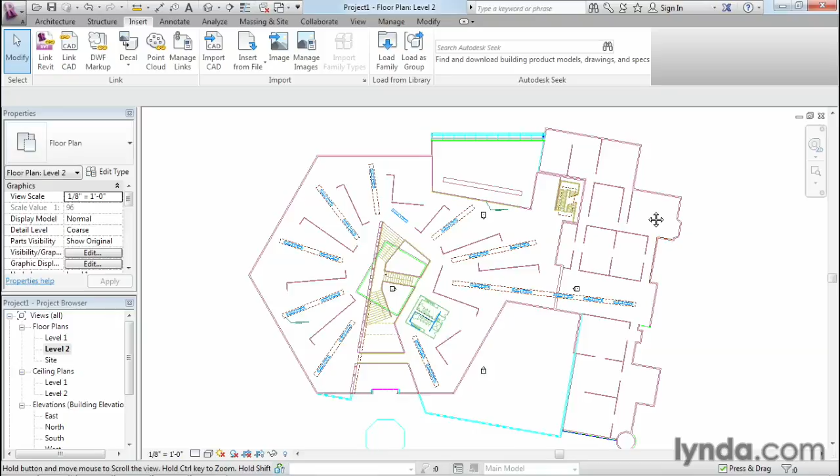So what I'm going to do is just pick some area of the file to work in. I'll pick these galleries over here. This is a museum gallery that we're looking at. I'm going to go to the Architecture tab, click on my Wall tool, and I want to just choose the basic settings. Let's do a 5-inch wall, leave the height unconnected for now, and use a center location line.

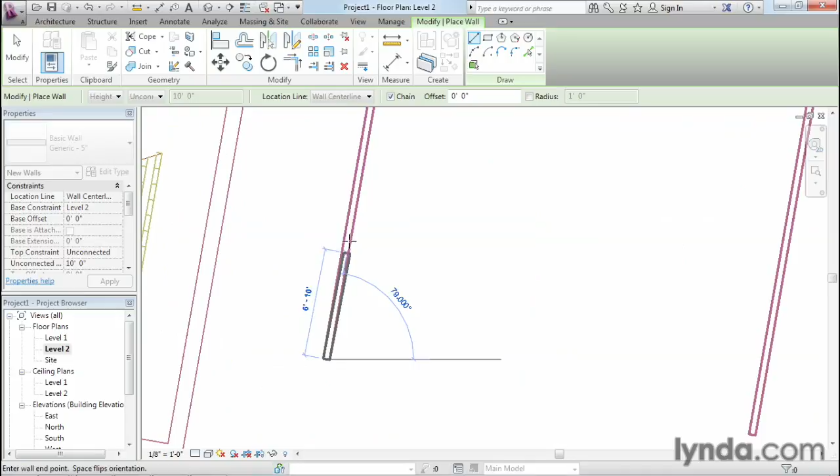Now, the reason I'm going to do that is Revit does this kind of ingenious thing where it sees the two parallel lines in the CAD file. If you zoom in, you can kind of tell that it's finding that center line and allowing me to draw this wall directly down the center of these existing parallel CAD lines.

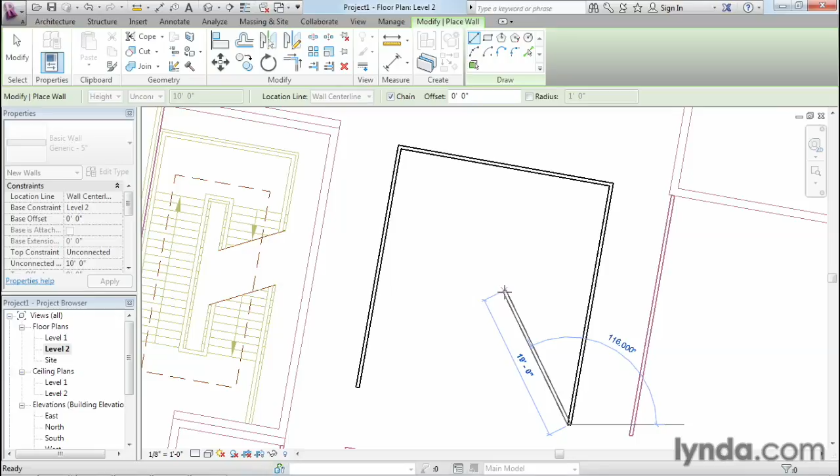So yes, I'm tracing over it, but you can see that it's going to move fairly quickly. The default behavior for walls in Revit is to chain. You can see that checkbox right here - I've got that turned on, and that's what allowed me to do the 3 walls in sequence like that. If I want to break the chain to move on to the next sequence of walls, I press the escape key a single time. Don't press it more than once, or you'll cancel all the way out of the command.

And then I can continue, find a nice comfortable level of zoom, and you can see that even though I'm tracing, pressing escape one time, it's going to move fairly quickly. While there's no automated push-button convert routine, using the underlying CAD file and a few little techniques, it's fairly quick and easy to trace over that file to begin creating Revit geometry.

Now, one last little tip here. The reason I brought in the CAD file using the preserve colors feature was to keep the CAD file in color when it came in. As you can see, as I begin to trace over this file with Revit geometry, the color slowly starts to disappear. The strategy there is that I'll know when I'm done tracing because everything will have turned simple black and white and all of the underlying CAD will be covered up.

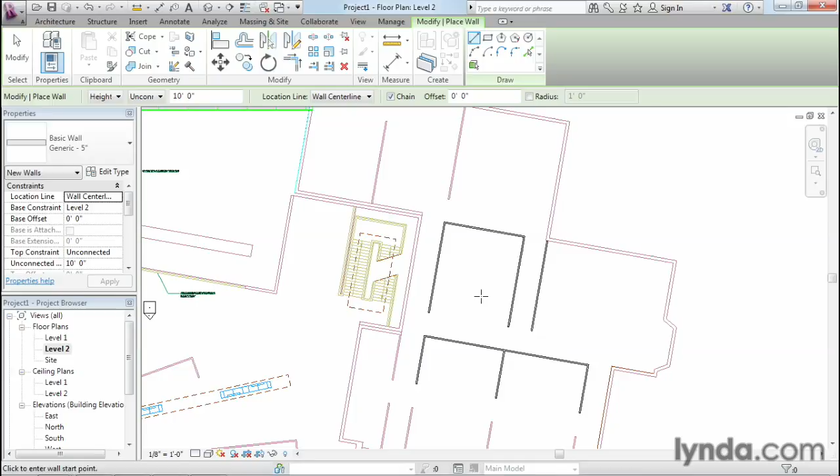When you're done, you just simply take the CAD file and delete it, and you're left with native Revit geometry in its place. Convert may be a little too optimistic, but the essential process to quote-unquote convert a CAD file is to simply link it in, trace over it with Revit geometry, and then remove the link when you're done.